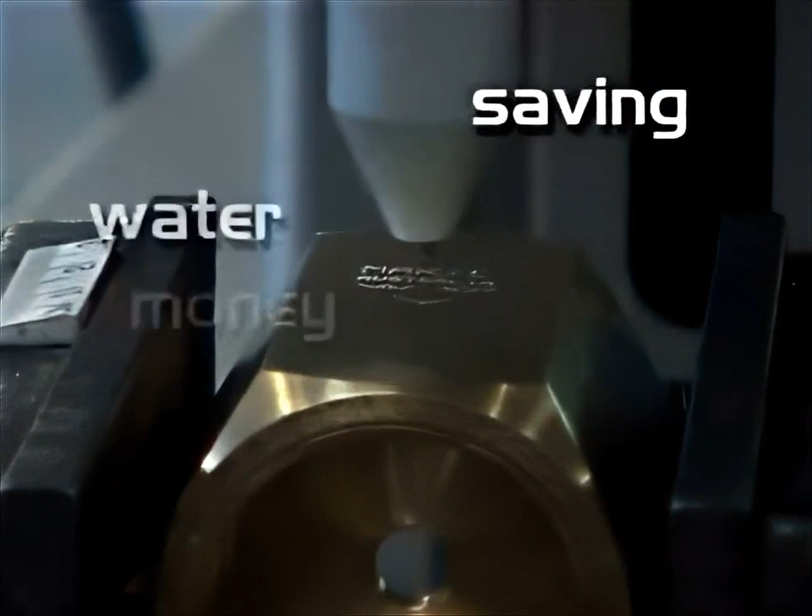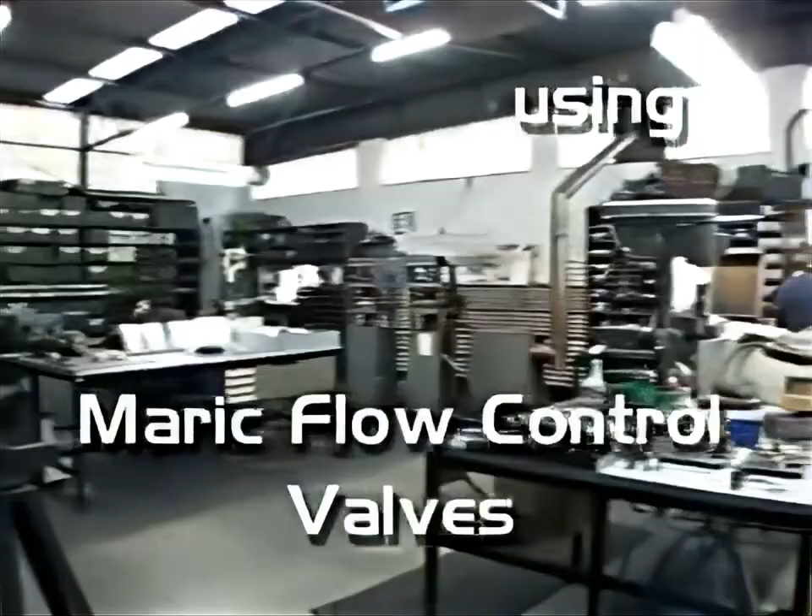Water. Water is plentiful. Expensive? No, water is cheap. Think about it. 97% of the world's water is unfit for human consumption.

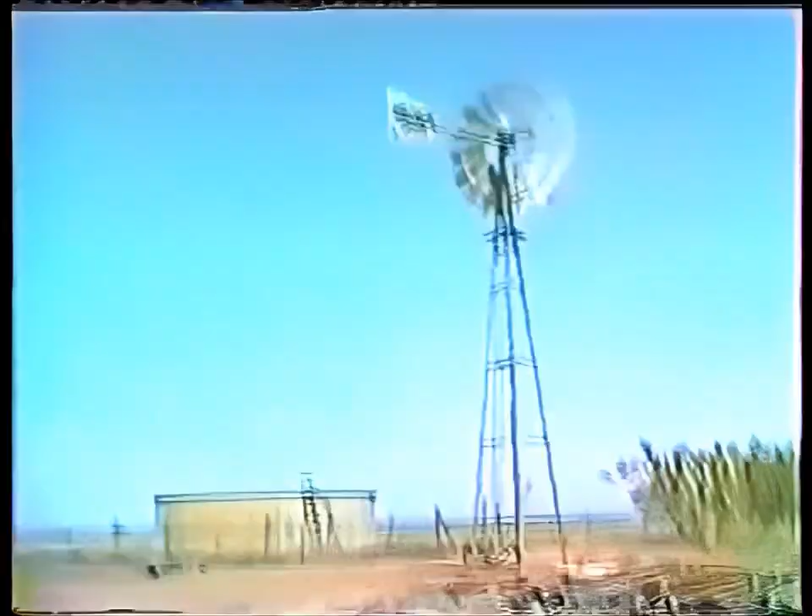The demand for fresh water today is outstripping supply. When demand exceeds supply, goods become more and more expensive. The world is getting thirstier every day, and unless we start saving water now, we may find the well dry tomorrow.

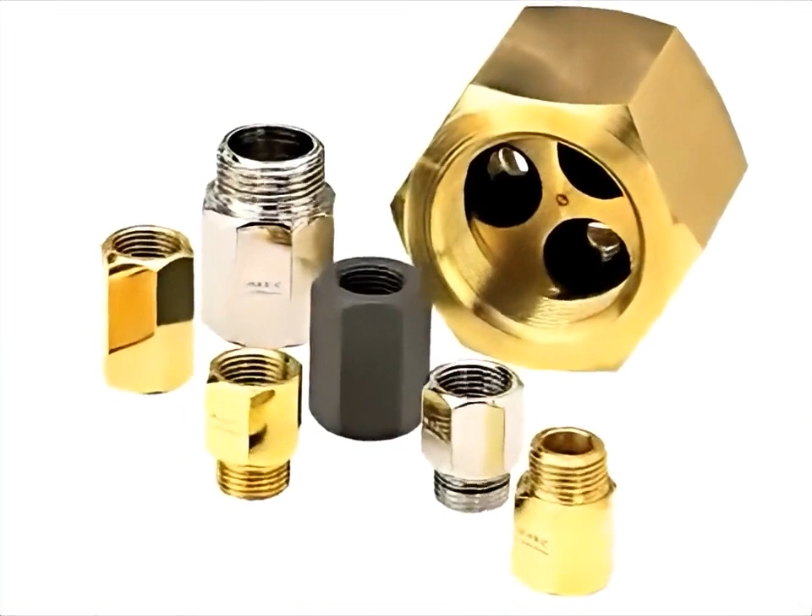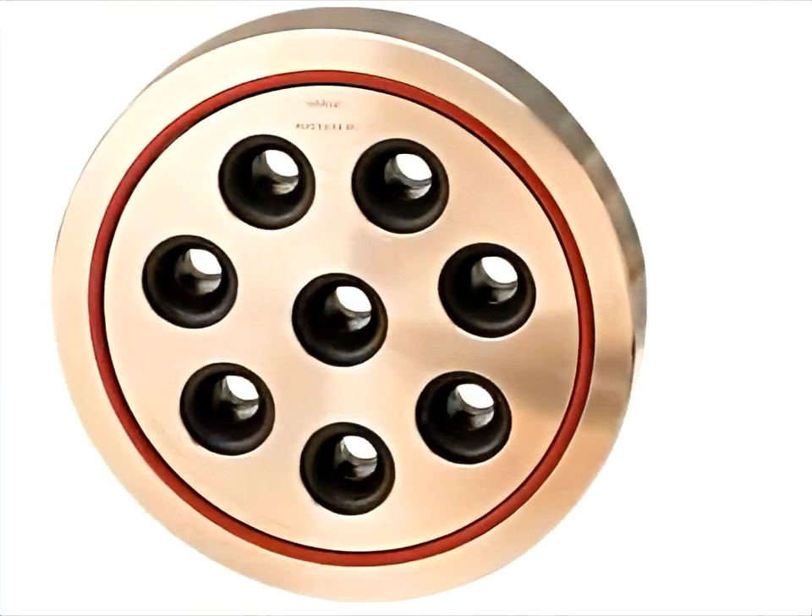An essential and proven product since 1960, these Maric Flow Control valves have been saving water and energy by controlling water flow and preventing waste. These valves will benefit you in industry, on the land, or at home. They are designed to deliver a constant flow of water when used on pressures varying between 15 and 150 pounds per square inch. Thus, only the quantity required is used. This assures enormous savings of water, energy, and of course, money.

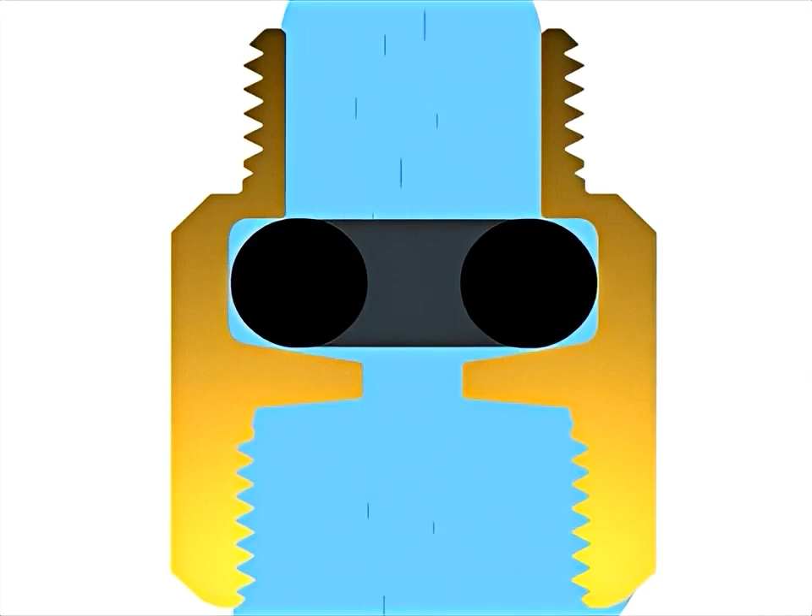This illustration will show you how the Maric Flow Control valve operates. The valve consists of a precision machined body in either brass, PVC, stainless steel or other specified material which houses a flexible control ring. The arrow indicates direction of water flow.

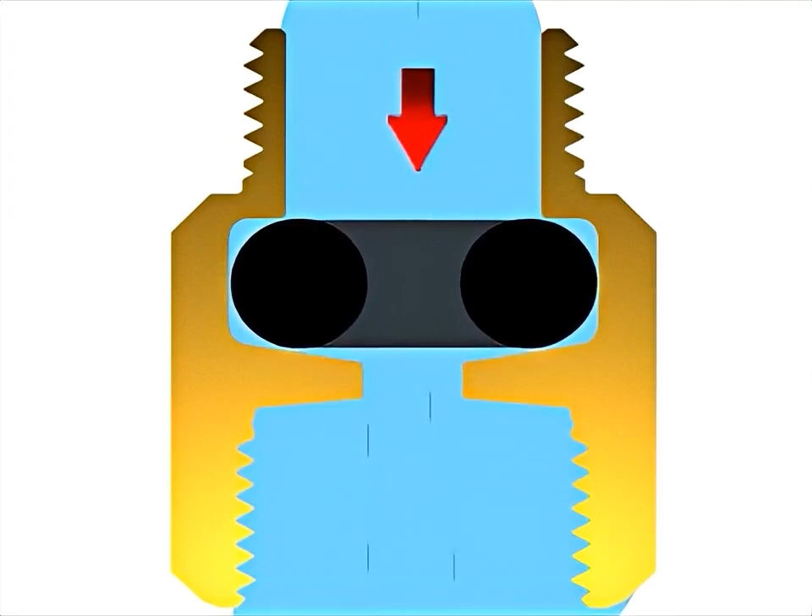The flexible control ring rolls down the tapered seat as water pressure increases, reducing the size of its own orifice, thus giving it a constant flow rate. The control ring rolls back up the tapered seat as pressure is reduced. The flexing of the control ring during operation helps prevent the build-up of rust flakes, as this demonstration shows, helping to make the valve self-cleaning.

We would like to take this opportunity to show you how we maintain our high standards during the manufacture of Maric Flow Control valves. These flexible control rings are the heart of the valve. They are manufactured from nitrile butadiene rubber, which is odor-free, taste-free, non-toxic, is unaffected by water or oil and many other liquids, and has a life in excess of 10 years under normal operating conditions.

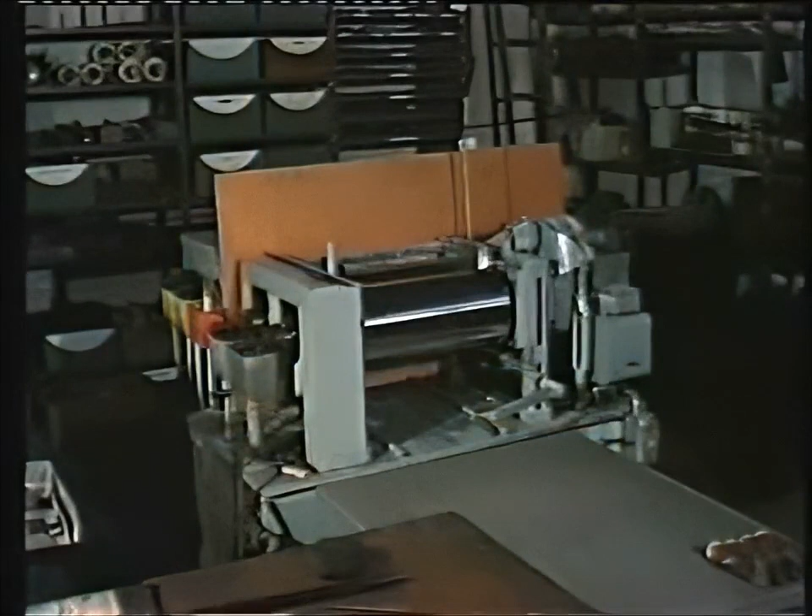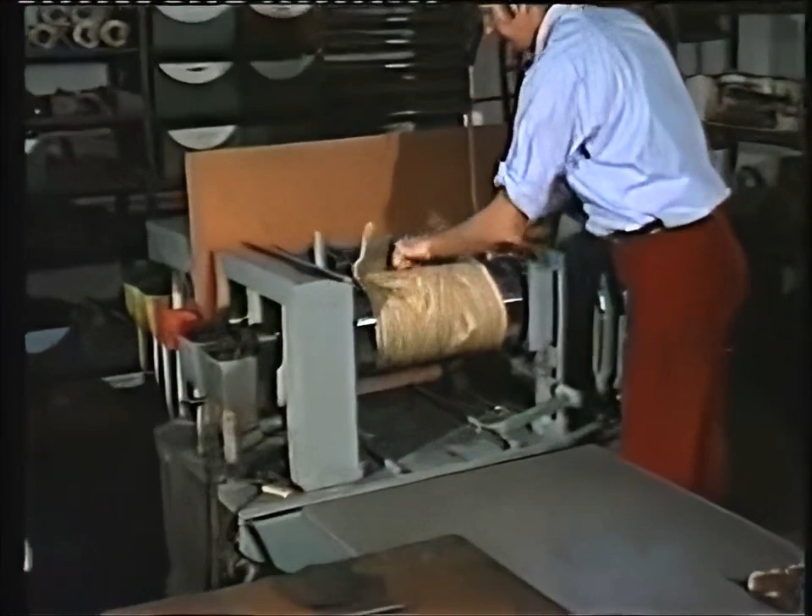Compounding this material is an exacting process. It assures quality and durability and is carried out in a rubber mill, which we shall now see in action. The carefully weighed rubber is being fed into the mill. Adding this ingredient will show the thorough mixing action of the mill. Carbon, another of the many essential ingredients, is being added. Cutting and blending after each ingredient is added helps give uniform and thorough mixing.

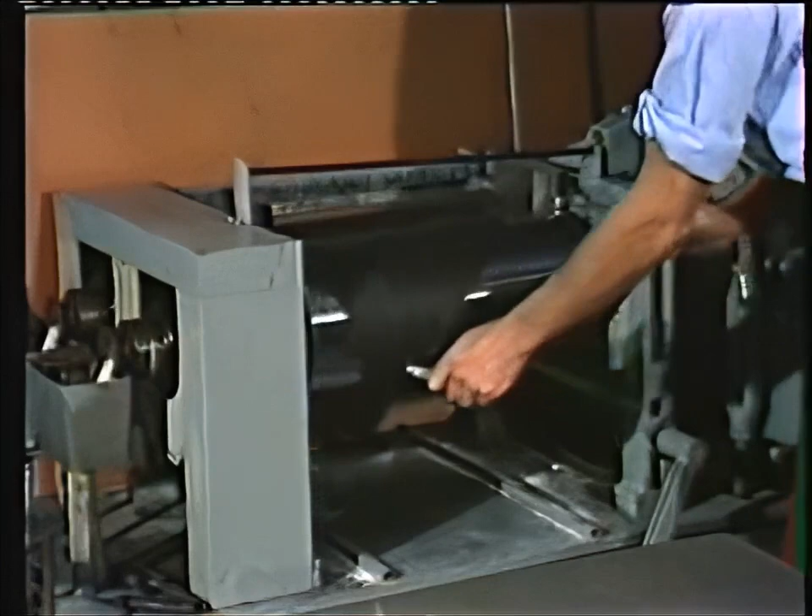Every mix is numbered. Sample control rings are cured, aged, tested, catalogued and stored for future reference.

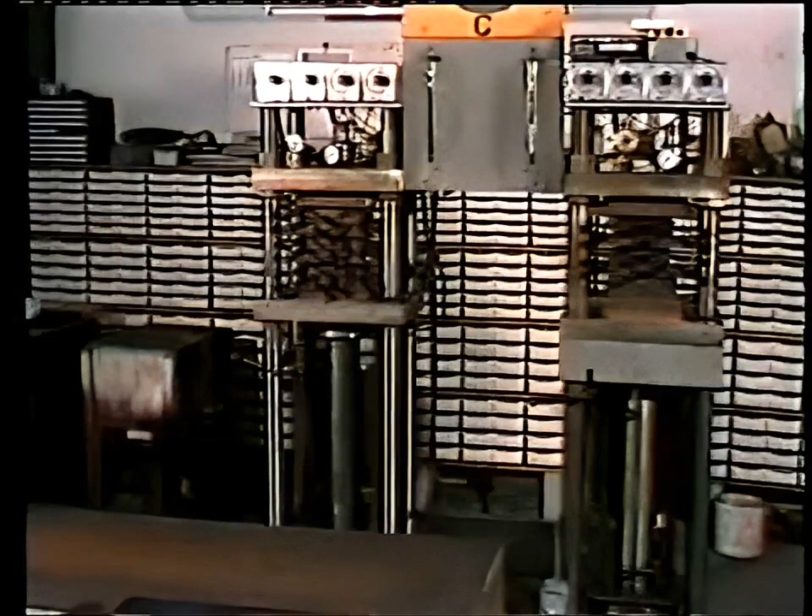The compounded rubber is later loaded into dies that are placed into these curing presses. They apply heat and pressure which molds, cures and transforms the material into Maric flexible control rings. Curing times and temperatures are critical. Curing cannot be rushed or vital properties will be lost.

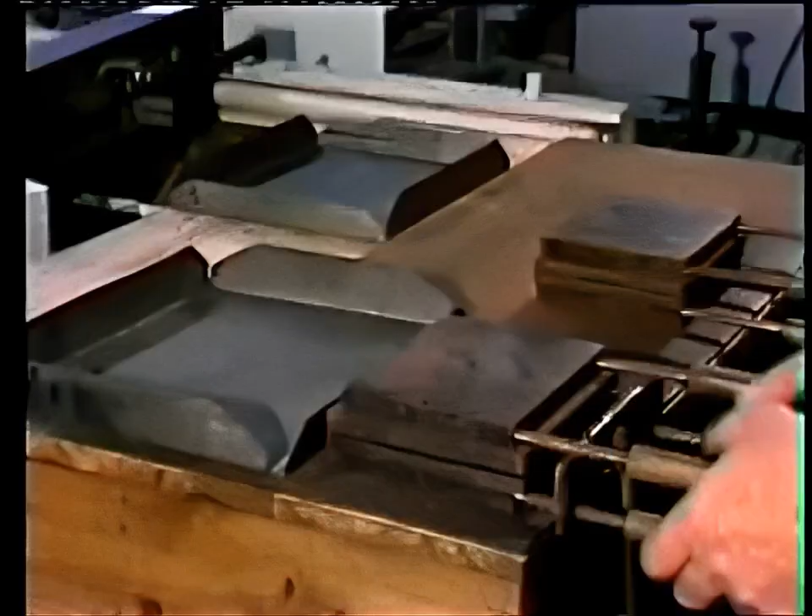Hot dies are being removed from curing presses. Number 25 series control rings are removed from this die. All control rings are thoroughly inspected and faulty rings rejected. All visually perfect rings are then heat aged to stabilize them before undergoing flow tests.

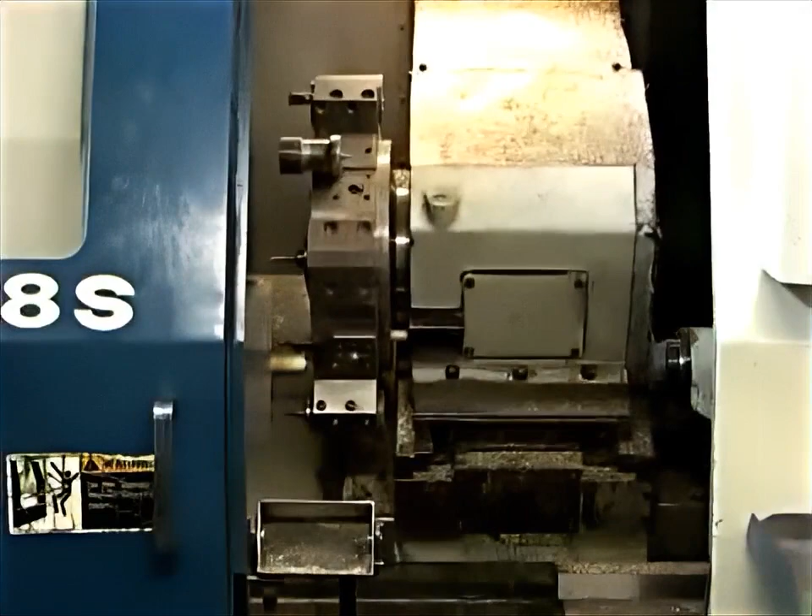This is the first operation in the machining of a half-inch female-male brass valve body. Precision machined bodies are essential for the accurate operation of Maric Flow Control valves.

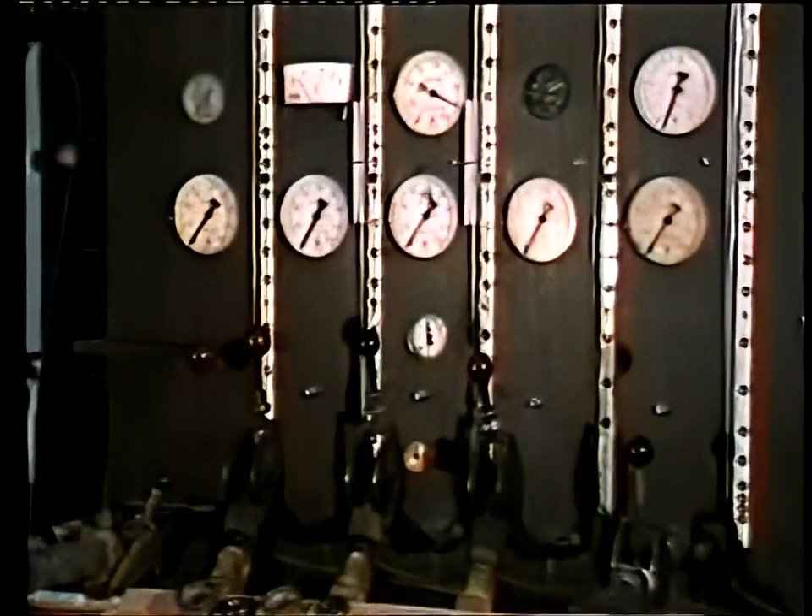All control rings are tested for accuracy on this test board. They are placed into holders with internal dimensions identical to valve bodies and are clamped into position. Water flowing through control rings under test lifts water in these columns, which indicates percentage variations above and below the rated flows.

Control rings are then subjected to water pressures between 15 and 150 pounds per square inch, or 100 and 1,000 kilopascals. Precision control rings must give flow readings within plus or minus 10% of rated flow over this pressure range. They must pass this test twice, firstly after curing and aging, and again immediately prior to sale.

At 15 pounds per square inch, we see flow to be within tolerance. At peak flow of approximately 60 pounds per square inch, the flow is still within tolerance. Again, at 150 pounds per square inch, the flow remains within the 10% tolerance.

These two control rings have passed their tests and are classified as precision. Control rings which test within plus or minus 15% of rated flow are classified as standard. Control rings outside this tolerance are completely rejected.

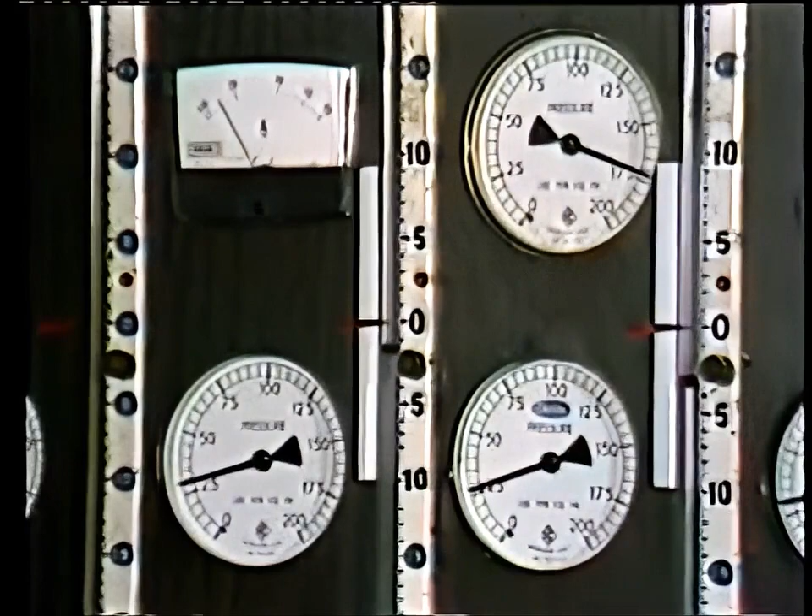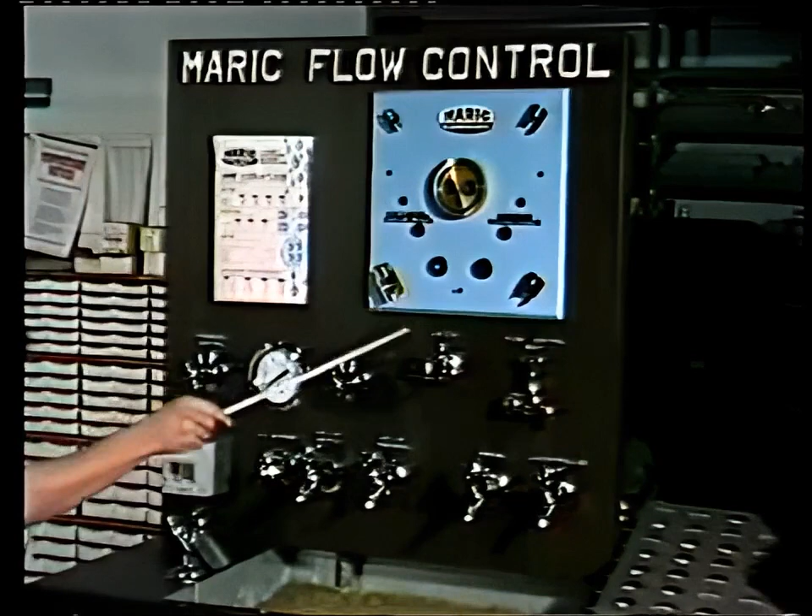This display consists of a pressure control tap, pressure gauge, shower rose, two Maric Flow Control taps, a manually restricted tap, a normal uncontrolled tap, and a drinking fountain.

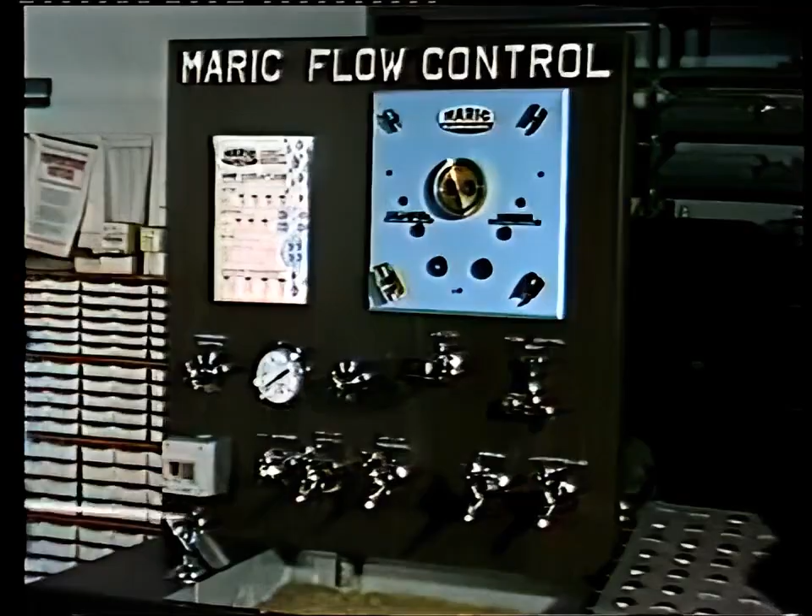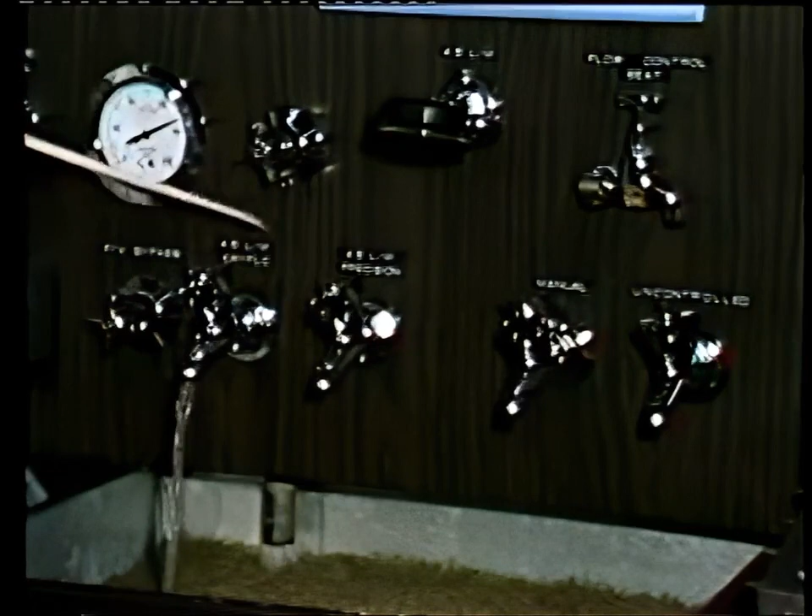Water pressure is adjusted to 150 pounds per square inch. This tap has a 4.5 litre per minute, or 1 gallon per minute, Simplex control valve fitted immediately behind the tap. Note small pressure drop when turned fully on. This tap has a 4.5 litre per minute precision control valve similarly fitted. Note again the small pressure drop.

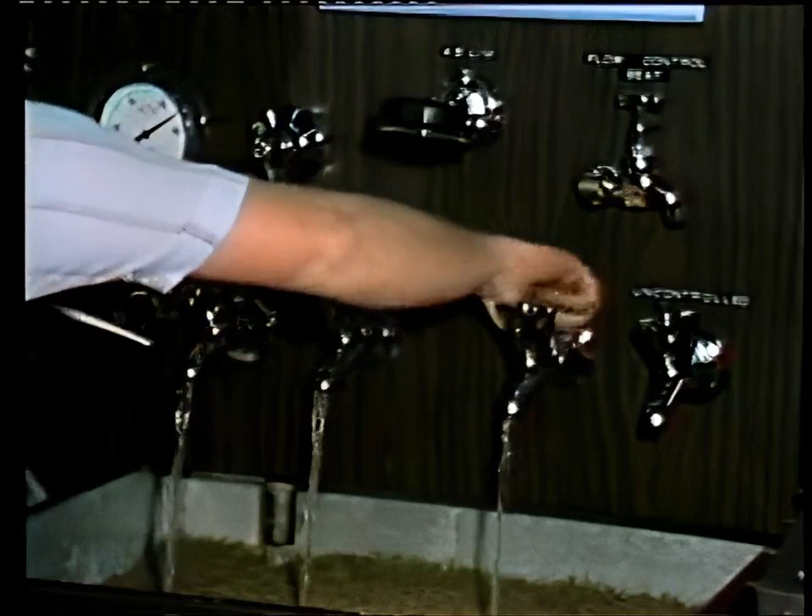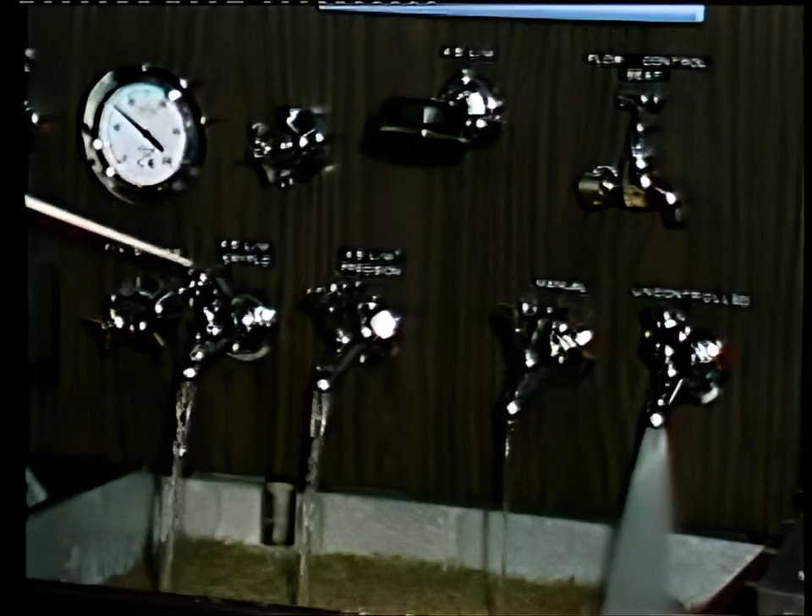This tap is fitted with a manually adjusted restrictor which we now adjust to 4.5 litres per minute. Once again, a small pressure drop. On opening this uncontrolled tap only half a turn, notice the large flow and big pressure drop in the system. Note also the reduced flow from the manually restricted tap. Note particularly the unaffected flow from the two Maric Flow Control taps. Big savings in water and money are possible if Maric Flow Control valves are fitted to all household taps.

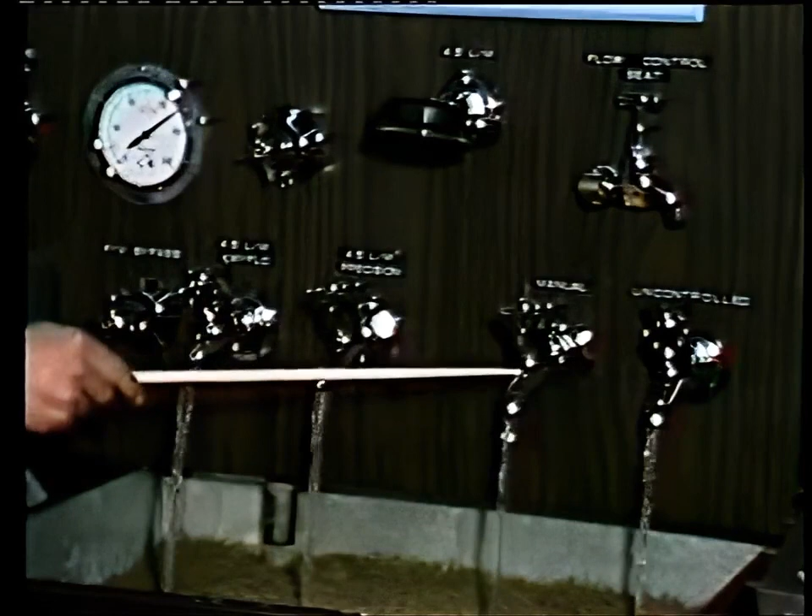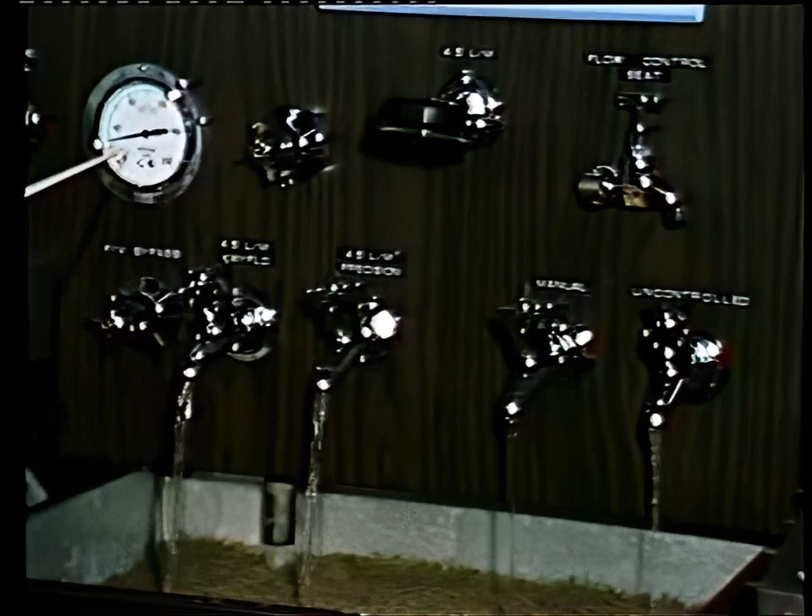Water pressure is readjusted to 150 pounds per square inch. The uncontrolled and manually restricted taps are adjusted to 4.5 litres per minute. Note the greatly reduced flow from these two taps when water pressure is reduced to 15 pounds per square inch. Again, note the unaffected flow from the two Maric controlled taps.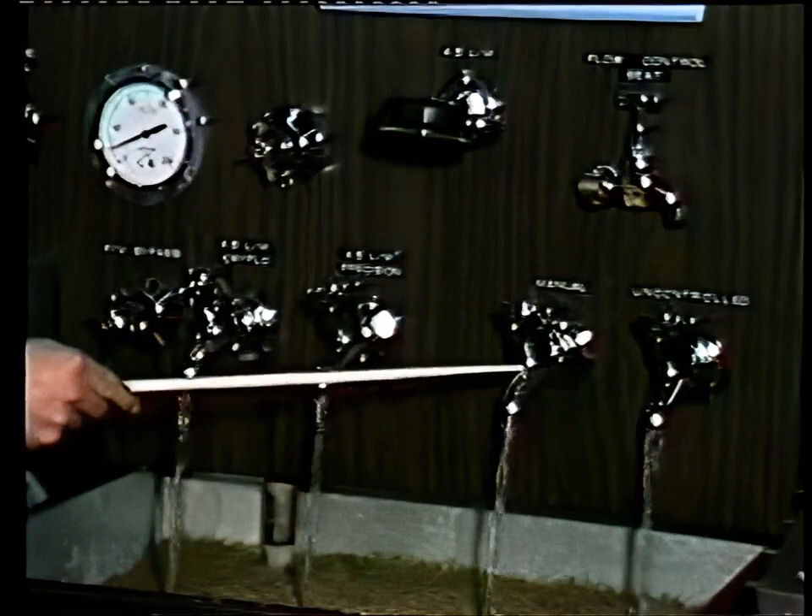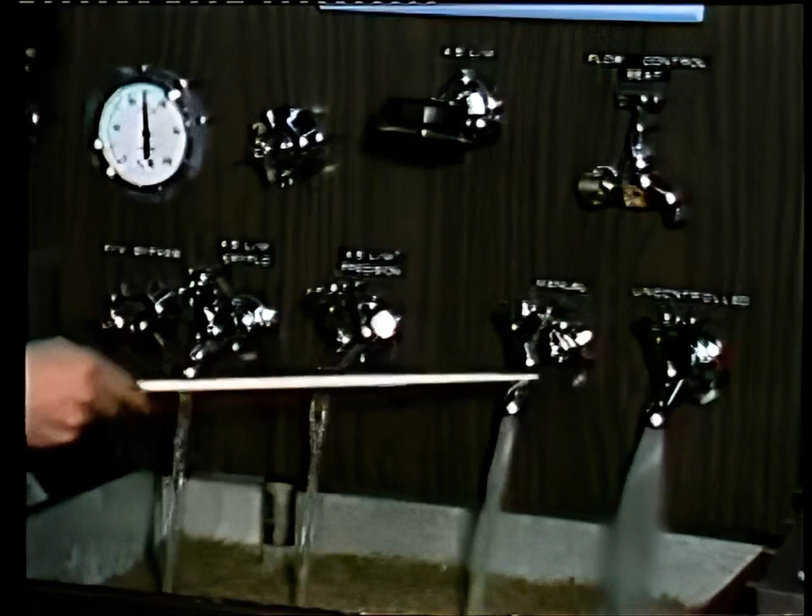Water pressure is held at 15 pounds per square inch, while uncontrolled and manually restricted taps are adjusted to 4.5 litres per minute. Observe the increased flow from these two taps when pressure is increased to 100 pounds per square inch. The two Maric controlled taps remain unaltered. The stream from a drinking fountain is greatly affected by varying water pressures, as is demonstrated.

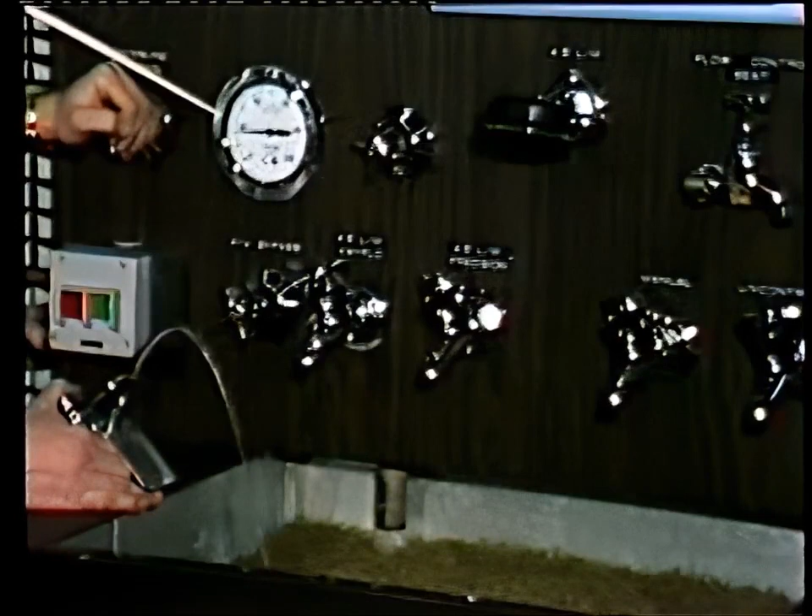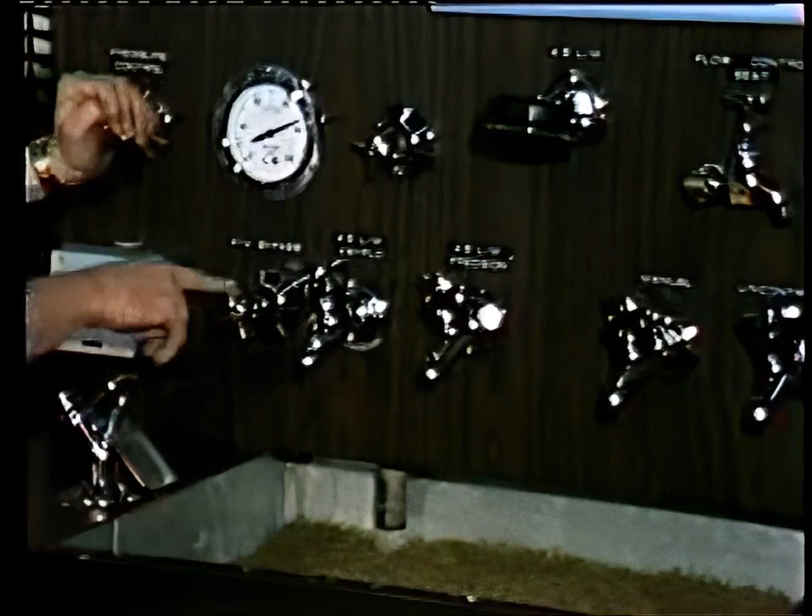When this bypass tap is closed, all water to the fountain must pass through a 1.2 litre per minute flow control valve. See how little the flow changes with the same varying water pressures.

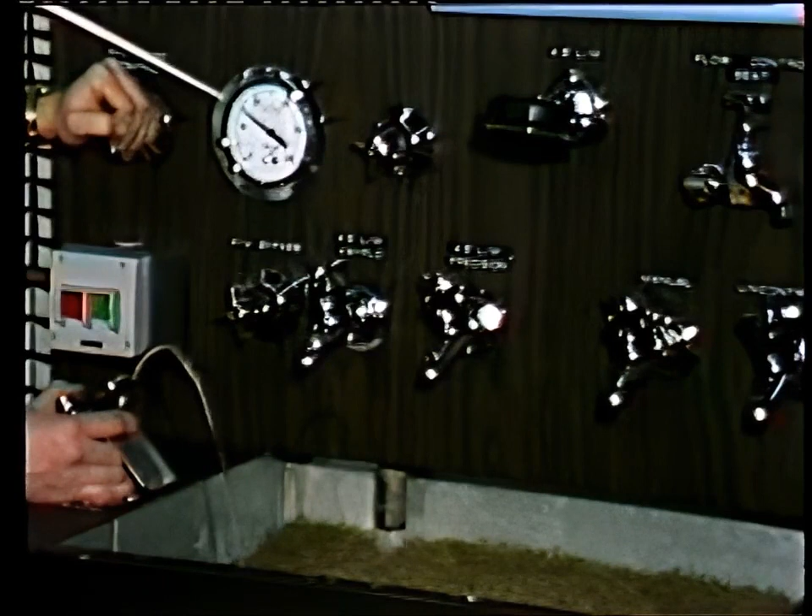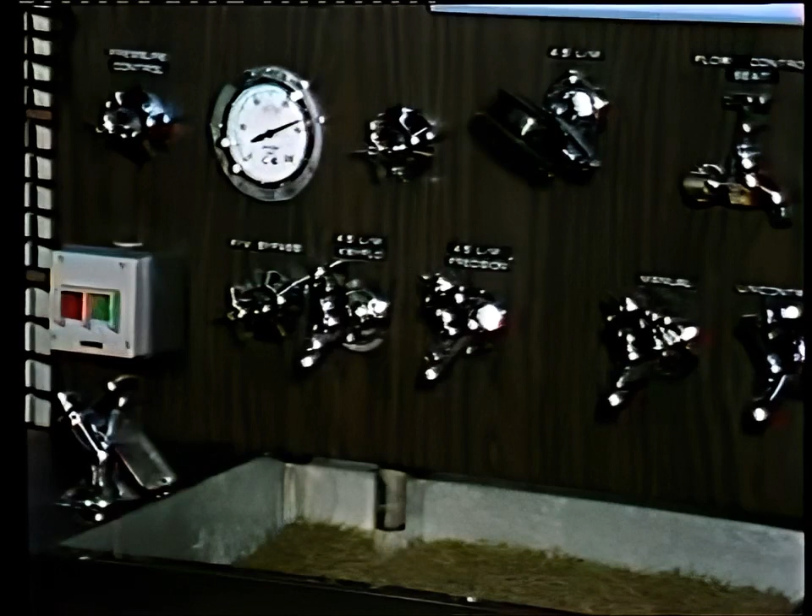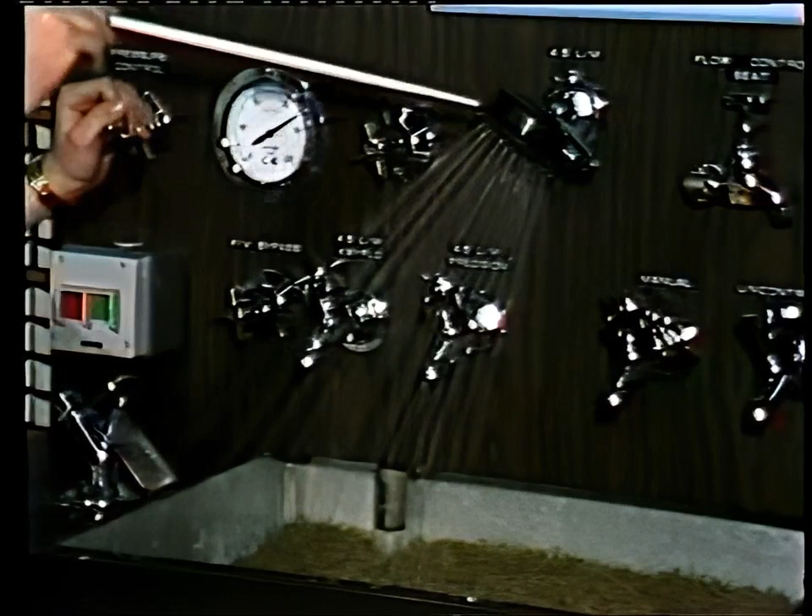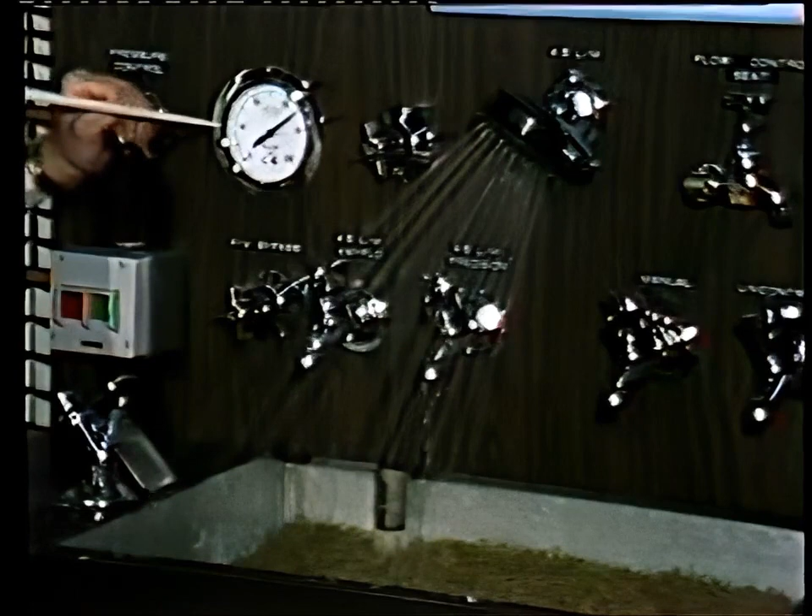Big savings of heating energy and water are possible when Maric Flow control valves are fitted behind shower heads. This particular rose is fitted with a 4.5 litre per minute control valve, which is ample water for showering. A large majority of roses use 18 or more litres of water per minute. Notice that the flow varies little over wide pressure variations. This prevents a great deal of annoyance and perhaps burnt backs when other taps in the house are used. By using Maric Flow control valves, a 75% saving of costly hot water and a 50% saving of cold water can be obtained.

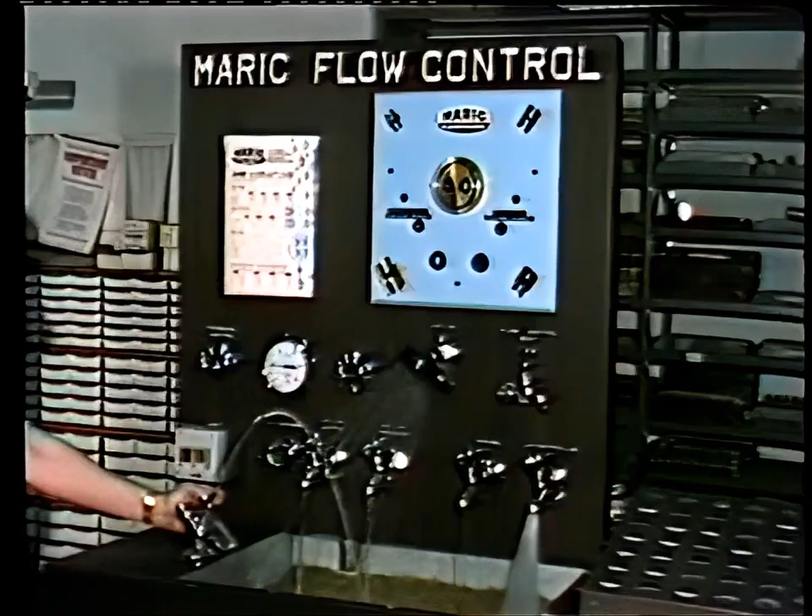By evenly distributing water, Maric Flow control valves save water in irrigation. We have set up two identical dome head sprinklers, one near ground level, the other 21 feet above. Both are connected to the one water line. At 15 pounds per square inch, the bottom sprinkler is operating satisfactorily, but very little water is flowing from the top sprinkler.

The water pressure is increased to 28 pounds per square inch. The top sprinkler is now working correctly at 6¼ litres per minute, but now the bottom sprinkler is overloaded and is using 12 litres per minute. Fitting a 6¼ litre per minute control valve to the bottom sprinkler rectifies this, and now both sprinklers are operating correctly, but only at this water pressure and sprinkler elevation.

If water pressure is increased to 50 pounds per square inch, the top sprinkler now becomes overloaded. It is fogging badly and is using 15 litres of water per minute. Fitting another 6¼ litre per minute control valve to the top sprinkler rectifies this, and now both sprinklers are operating as designed. Any further pressure variations up to 150 pounds per square inch will have no effect on output from either of these two sprinklers.

With Maric Flow Control valves fitted to sprinklers, hillsides are no longer a problem. Water is no longer wasted, even distribution of water is assured, and equally important, money is saved.

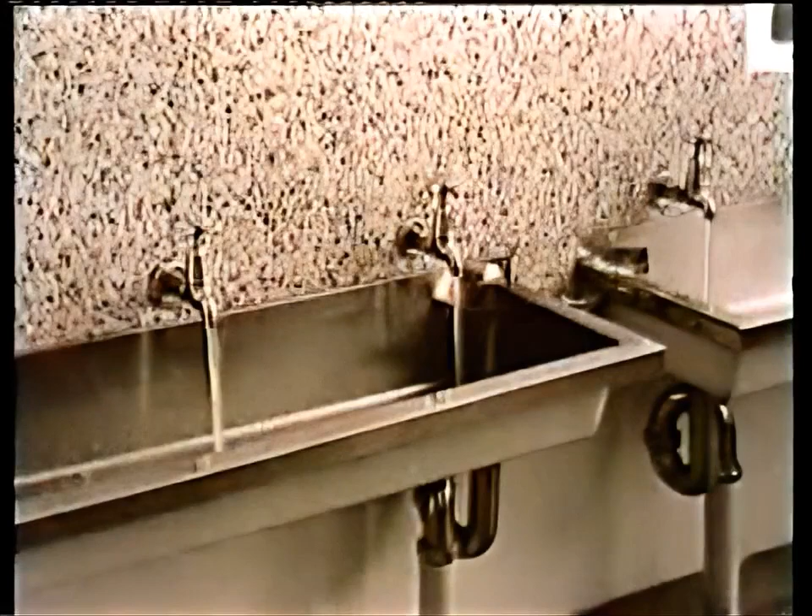School taps are an ideal and necessary place to install Maric Flow Control valves. Our flow control valves have been saving water for 12 years in the secondary school at Gepps Cross, South Australia.

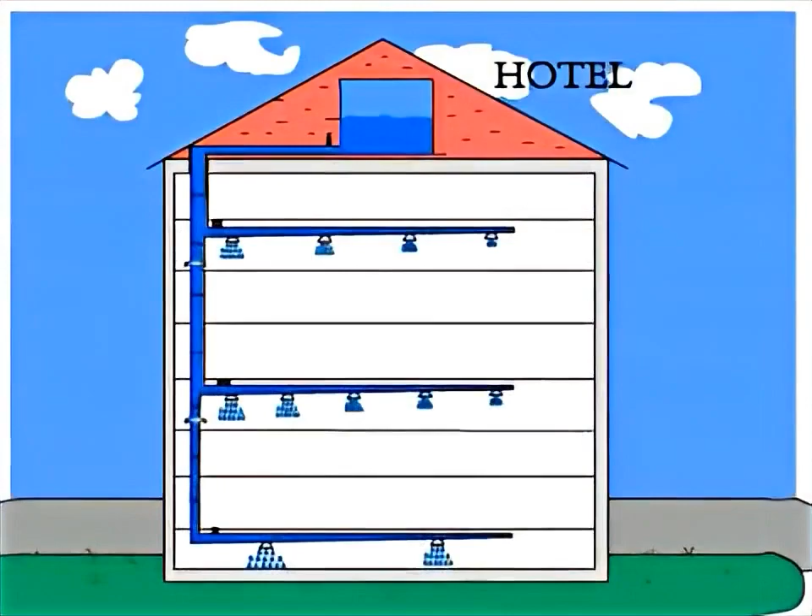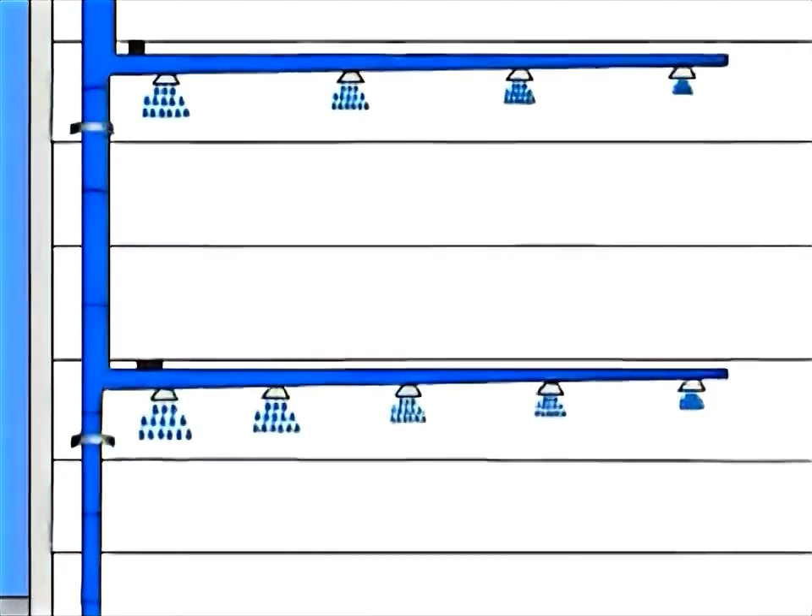Multi-storey buildings invariably have water feed tanks installed on the roof in order to supply water to all outlets on all floors. Outlets on the top floor will have low pressures and low flows, while outlets on lower floors will have higher pressures and higher flows. To help even up these flows, a complicated system of pipe sizes and reducing valves must be designed. However, this cannot assure an even flow to all outlets because the number of taps being used at any one time will vary.

Installing Maric Flow Control valves on all outlets will reduce pipe sizes, eliminate pressure-reducing valves, and give an even predetermined flow of water to all outlets. The paying customer on the top floor can now have the quantity of water he requires when he wants it. So can the chef working on a lower floor and anyone else, anywhere in the building, who wants water at any time. The potential and importance of Maric Flow Control valves in industry is virtually unlimited.

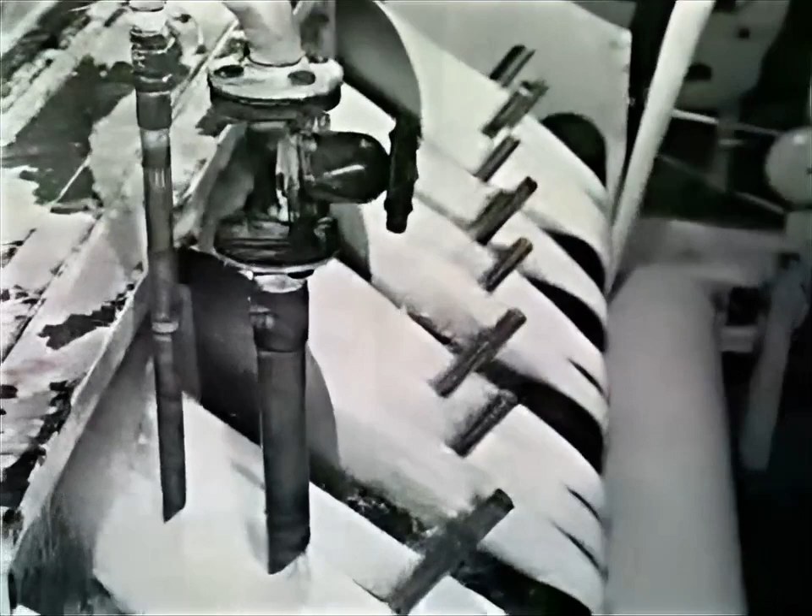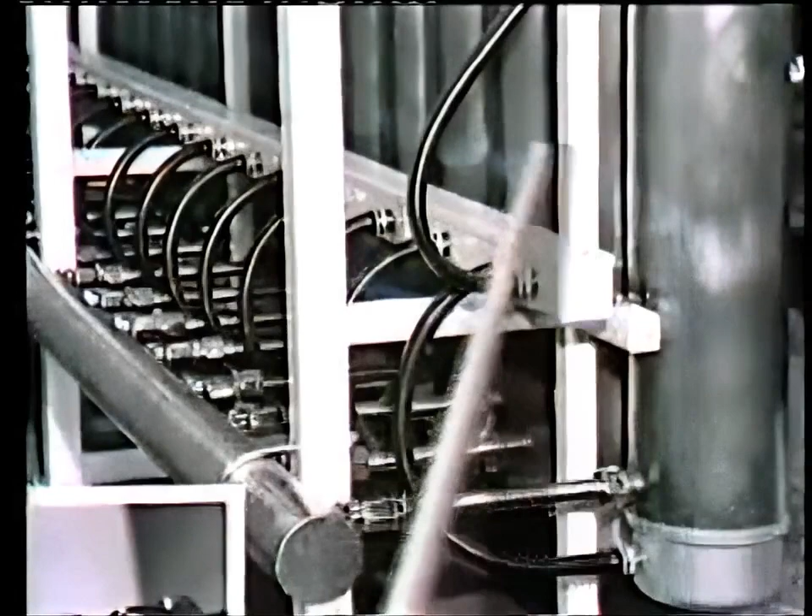Here we see one of our valves in use in the textile industry at Actil cotton mills. The petrochemical industry also uses our valves, as we see in this Shell tanker terminal in the United Kingdom. Our valves control the flow of water through these ultraviolet water purifiers in this Coca-Cola factory in Australia. They are also used in these Australian-made tube-light water purifiers.

To safeguard health, bacteria in water must be destroyed. A Maric Flow Control valve controls the flow of water as it passes along this ultraviolet lamp. Too fast a flow, bacteria will survive. Too slow a flow, purifying costs will rise. Fitted with Maric Flow Control valves, they will operate correctly and safely, high in a hospital or at sea level in a fish processing plant.

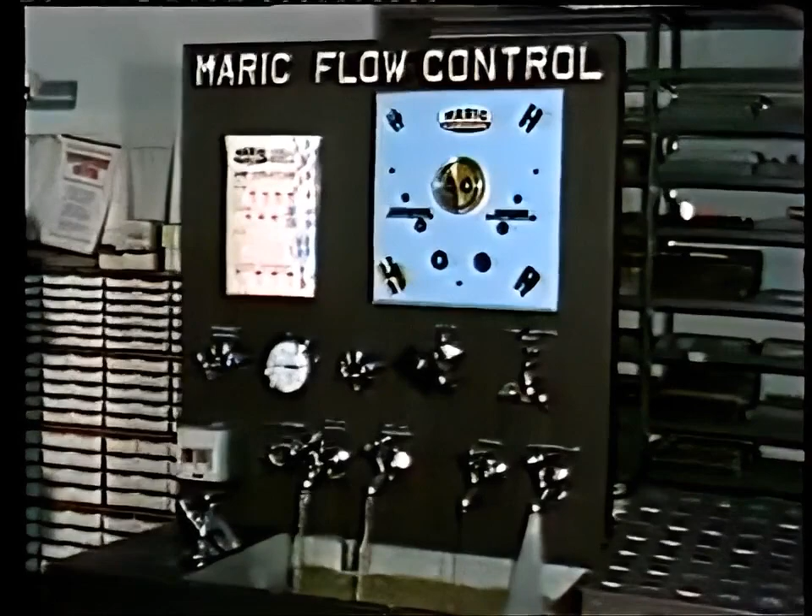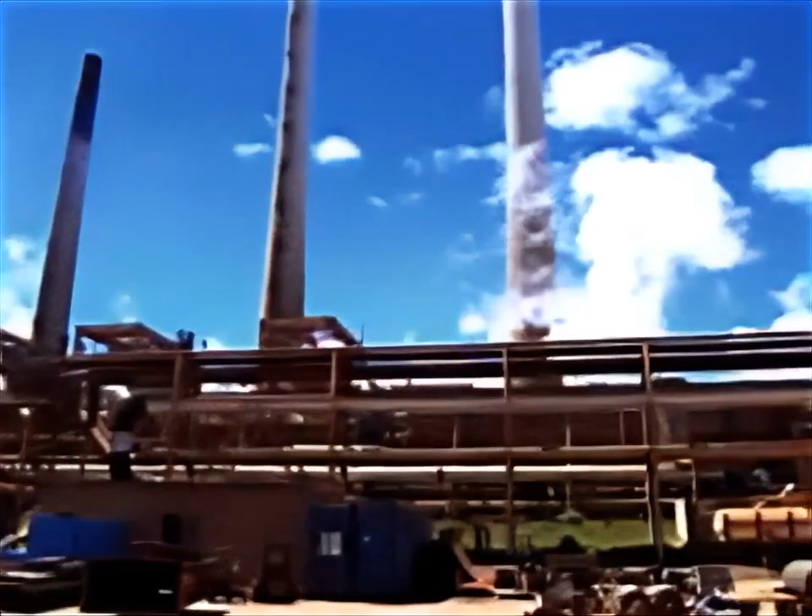If you want to be sure that all your hotel showers get the correct amount of hot and cold water, no matter how many are in use at the same time or on any level, or if you want to irrigate all your plants with the correct amount of water, regardless if they're at the top or bottom of a hill, or reduce waste from your household taps, or conserve water in industry, the Maric Flow Control valve is the inexpensive and reliable answer. A Maric Flow Control valve is the simple, accurate way to get the quantity of water you require when you want it, regardless of changing water pressures.

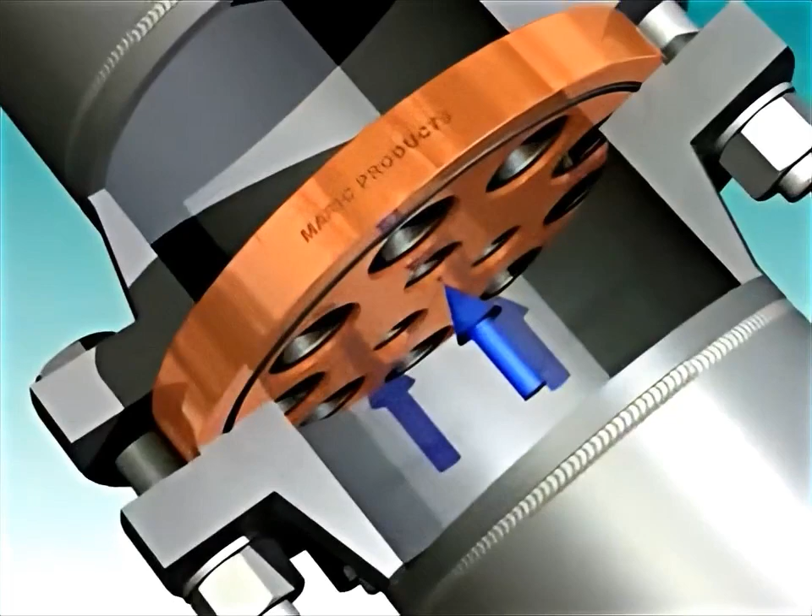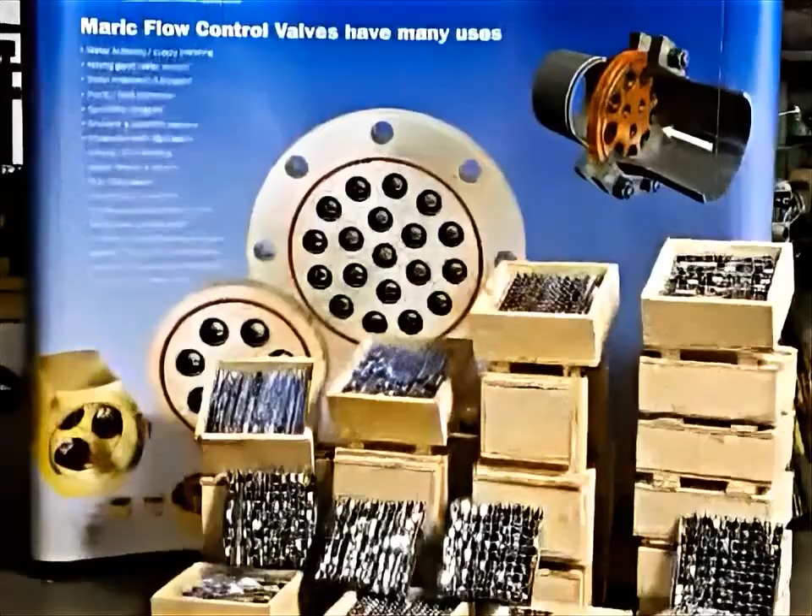Our flow control valves are economical, as the low cost is quickly recovered by the water and energy savings. Water is rapidly becoming more and more expensive. Start saving today by installing Maric Flow Control valves, chosen from our extensive range of flows and bodies.